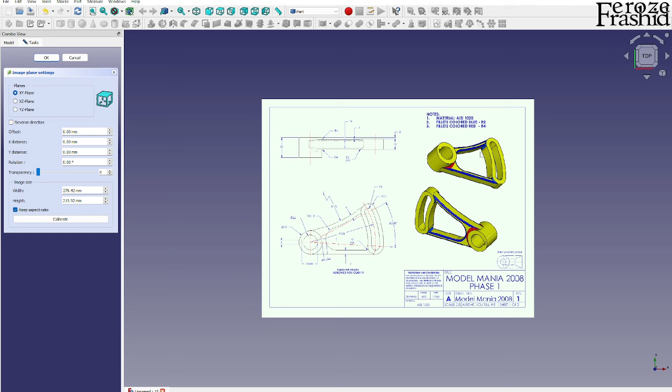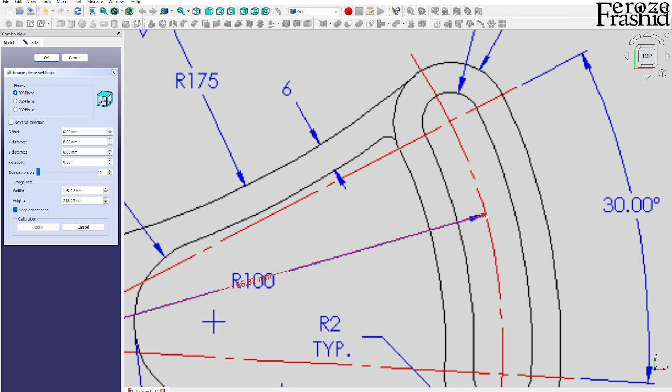On phase 1, I'll be starting with the whole sketch. I'll build this whole sketch first, which is a tricky one, as a master sketch, and use that to build this model in 3 separate parts. Although I'll build the whole sketch together, I won't extrude it at the same time - I'll separate that into 3 different parts.

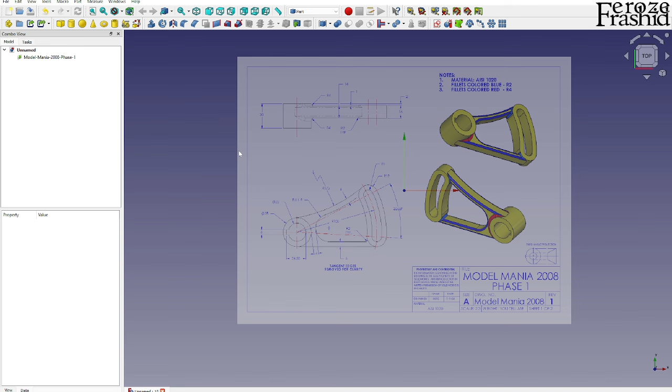I'm going to keep this plane on the XY plane and start sketching. Let's go ahead and relocate the image to the center.

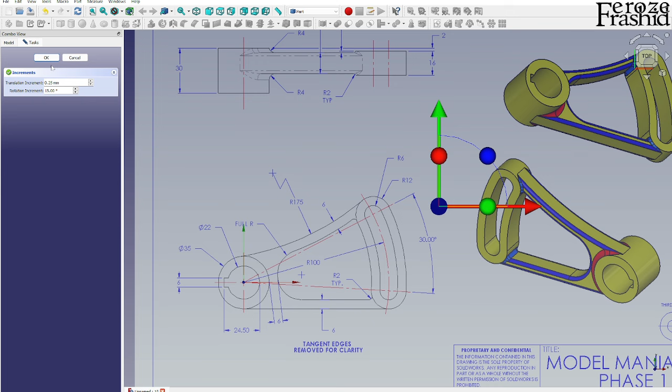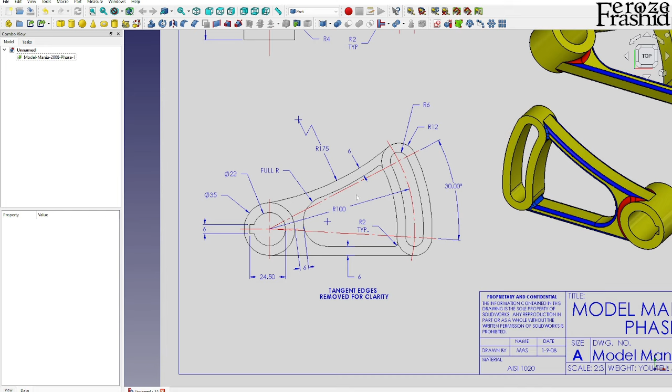All right, so what I did was image processing. I don't want to describe that right now because this image processing feature is going away in the next FreeCAD version 0.22, but there are multiple videos on my channel showing how I do that image processing.

So I want to start sketching on the XY plane. As I said, I'll be building the whole thing as a master sketch. Let's go ahead and start working on that.

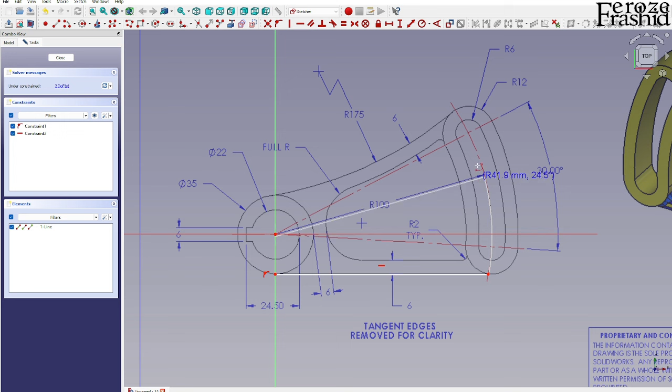I want to start with a straight line between this point and that point, and then draw this reference line. I think I misplaced this - so these two will be the same, and then these two will be the same. Obviously this will be construction geometry, just a reference line. I want to go ahead and apply those constraints.

I normally do the sketching first and then apply the constraints, but today, for this model, it's important that I apply these constraints as soon as possible because that will actually place things where they should be.

I also want to draw this construction geometry between this point and the center of this curved slot, so that I can apply this 30-degree angle right there.

I'm not worried about this moving thing right now - we'll address that in a moment, but let's get back to drawing different parts.

On this one, I could actually go ahead and draw the whole circle, but I won't, which I'll explain towards the middle of the video.

I want to take this point-on-line constraint away so this is free moving, and then apply a tangential constraint on this one, which is important - although it will end up on the same axis, it's important that I took it out.

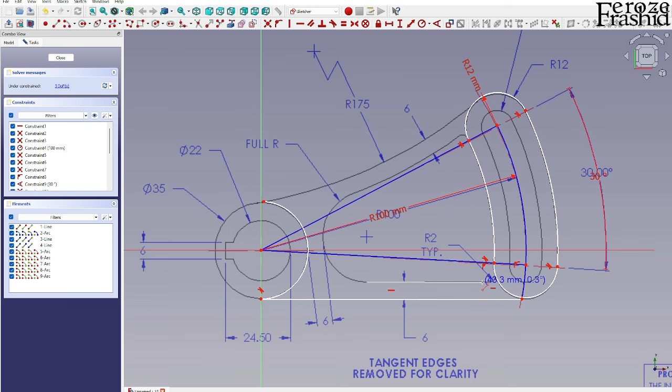Now I'll draw another straight line between this point and that point. Here, let me keep this line right there - there is this curve, which is essentially a fillet, and I want to avoid that right now because it creates a problem in FreeCAD later in the process. So let's forget about that curve, and bring this line all the way here, placing it on this curve as a point-on-line constraint.

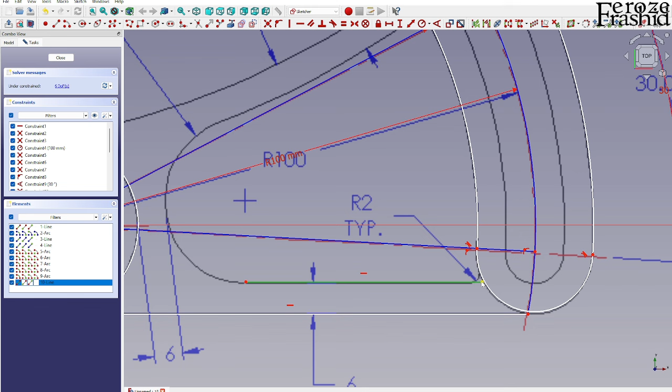And then I want to draw this endpoint and rim point curve and bring it up here, right there. So before I apply the radius, I'm going to go ahead and apply the tangency here at both ends, and then I say this radius is 175.

It is still switched a little bit. I guess we will have to fix a few more positions on this one. So let's go ahead and start working on the inner curved slot.

On this one, the constraint will be pretty simple. This is radius 6, and that's all we should have applied other than the tangency.

All right. One thing I can say, I can actually constrain this one 17.5, see if that actually helps us stabilize the model just a little bit.

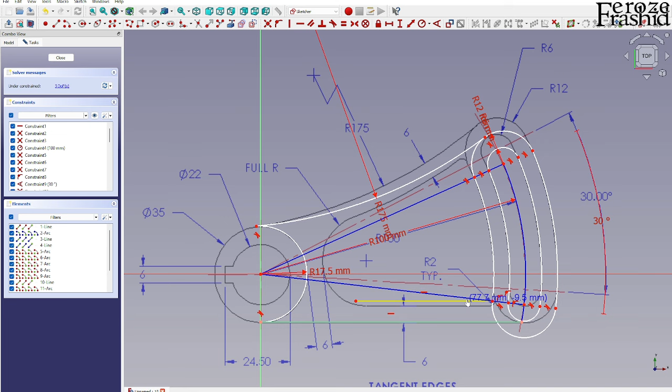Okay, there. So it's kind of like we are at the point where the model is a little stable, and we have 3 more lines to draw, one of them which is this inside half circle, and then we switch back to endpoint rim points and draw a line.

Again, this corner is supposed to be a fillet, and we are avoiding that one, right? And there, we don't want to make any tangency right there, so these 2 points are just point on line constraint.

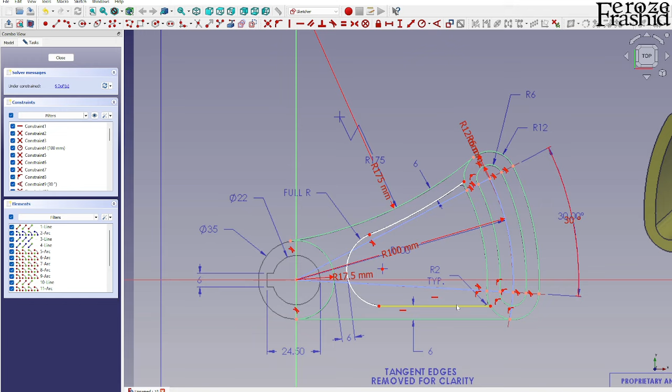I want to trace these 2 centers at the same point, and then see there is a 6 mm gap between these 2 points.

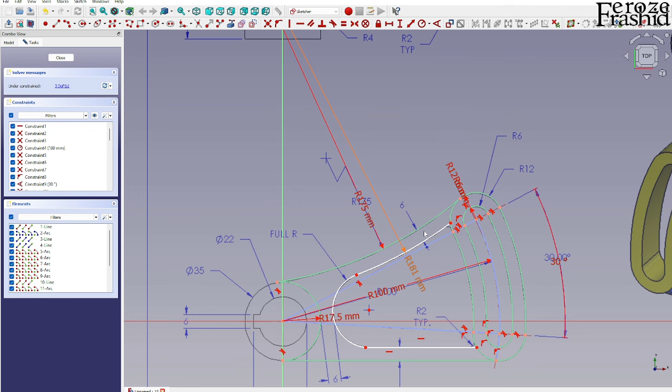So if it is 175, I take this radius as 175 plus 6, right? So that kind of makes it parallel because both of them are coming from the same center.

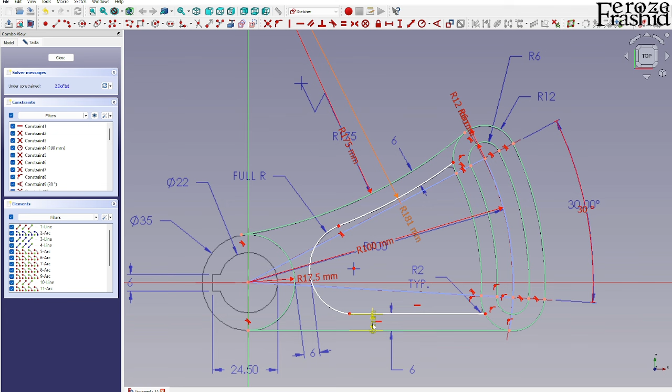On this one, the 6 is a different deal, and here we can make it easy. So between these 2 points, the distance is 6. That's easy to apply because both of these lines are horizontal, and it's easy to apply that. On this one though, it's not horizontal or vertical.

So what I want to do is take a construction geometry and draw a line between these 2 centers, both centers, for the respective arcs. Now we know that this line is perpendicular to both arcs.

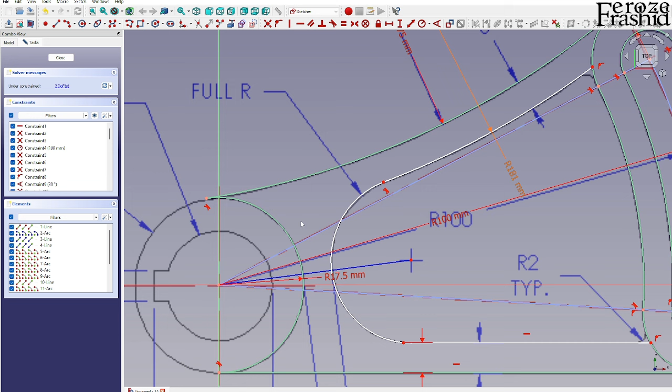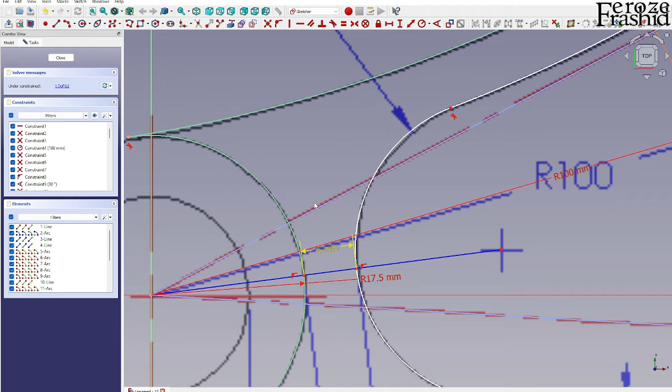Now I can go ahead and place 2 points on this line, and this point will be on this arc, this point will be on this arc, right? And the distance between these two would be 6. So that kind of solves that issue, this inclined length issue.

And we have 1 degree of freedom left, which is here, and I think I know where it is. There should be a tangency between this point, this line, and this line, and that kind of solves our issue. So on this part we did only half of it, so let's go ahead and complete the circle.

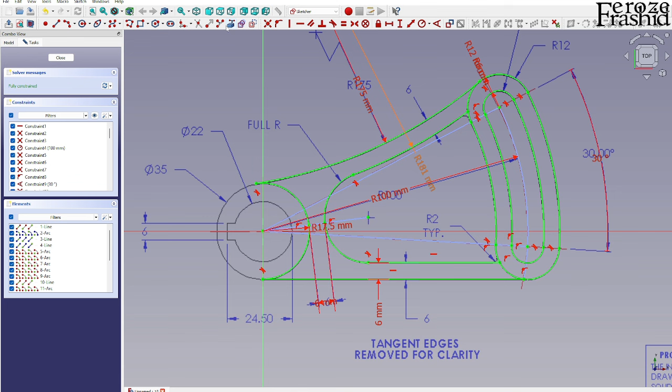Here I want to make note of this vertical line. So this is not like a full circle.

This will come all the way here, and then the joining will be a vertical line of 6 mm. So this length is 6 mm,

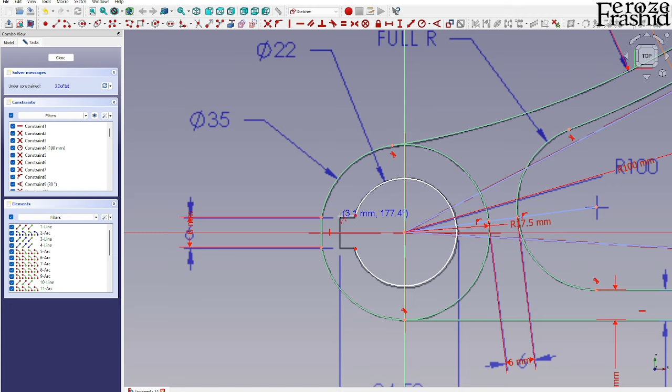and then the inner circle will follow the same trend. We come all the way up here, and then I divided this line into 2 to make it equal. That way, that's me saying these are symmetric, and then one of them is 3 mm.

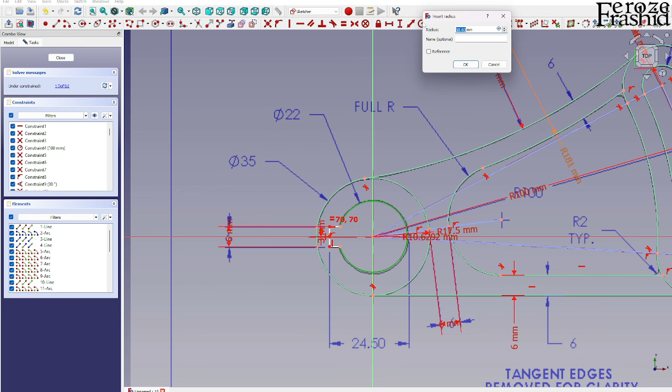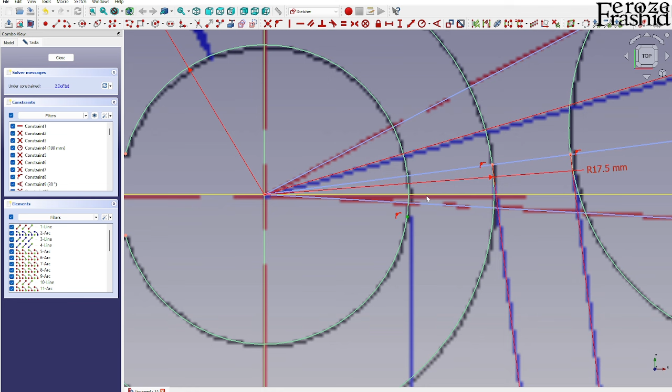And then we come back to this where it says diameter 22, so that's radius, diameter 22, radius 11. And then it says the distance between this line and this point, or like this farthest corner on the circle, is 24.50. So we go back to the point style and place this point on the axis. We know that that's the farthest point, and the distance between these two is 24.50.

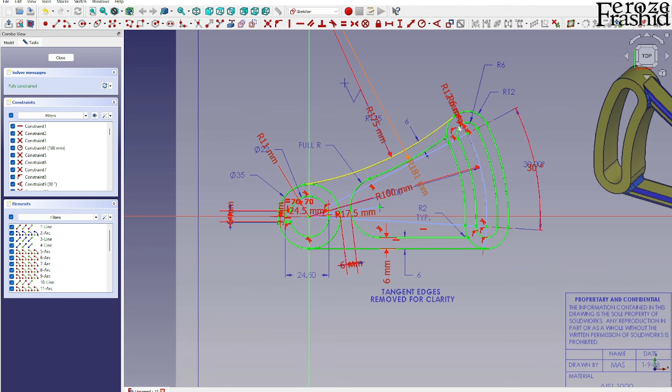So that's our master sketch. Everything's perfect except these corners. We'll try to build up those corners later on, but let's not worry about this right now.

And I'm going to go ahead and rename that as sketch master. I want to use this sketch to build this model in 3 parts: this is the left part, that's the right part, and there's the middle part. So I'm keeping this sketch there and then copying it, Control C on the keyboard, and then pasting it, Control V 3 times. Let's go ahead and say this is left, this is middle, and this is sketch right.

So we will work on them one by one. I'm going to hide this master sketch. Now these are copy paste, so we can change them independently. These are not clone.

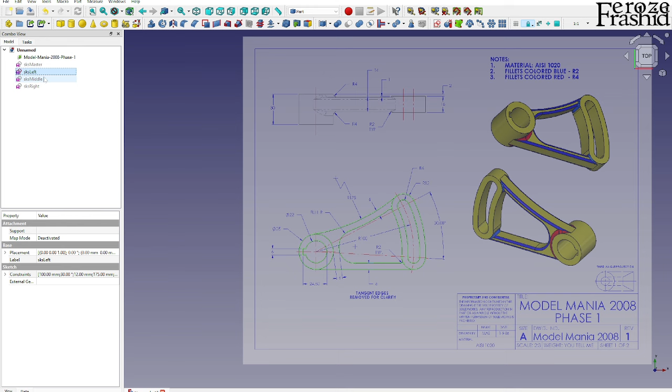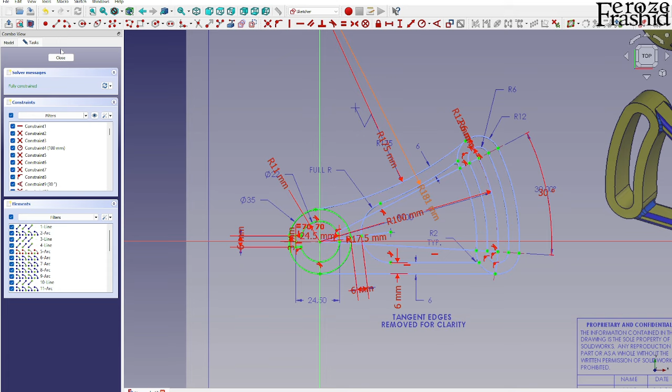I'm going to go ahead and hide these two and keep this one. So this one, I want to keep only this left part. I'm going to go ahead and select everything else and make those construction geometry. So this construction became solid there. So that's one way of saying this left of the right side is irrelevant for this sketch. They are there if I want to make them active, but now we only will get this left part.

So let's do that same thing for the middle one. When I was building this, I did not go the solid, so there are like two different parts. This is the reason that I did it. I'm going to take all of these and make them construction geometry, and leave this middle part, and then take all of these and make them construction geometry.

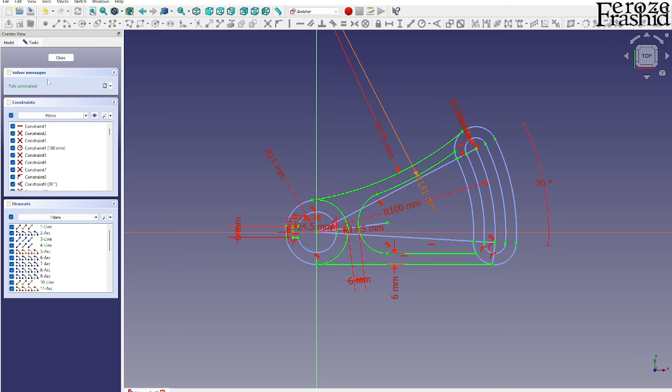So doing so, we have a not closed sketch which won't work, so we'll have to do a little bit of work on this one. So we want to close these two lines here.

So I am going to take another arc between this point and that point, and I'm going to say these 2 points are coincident, and I can make these two coincident. Theoretically that should work, but it creates some problems. So that's kind of like over constraint, and that's like too many complications.

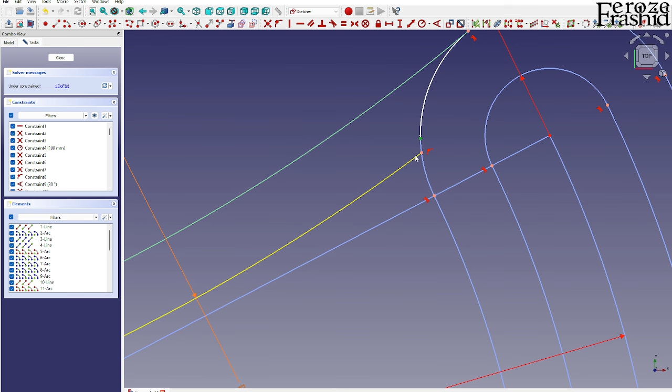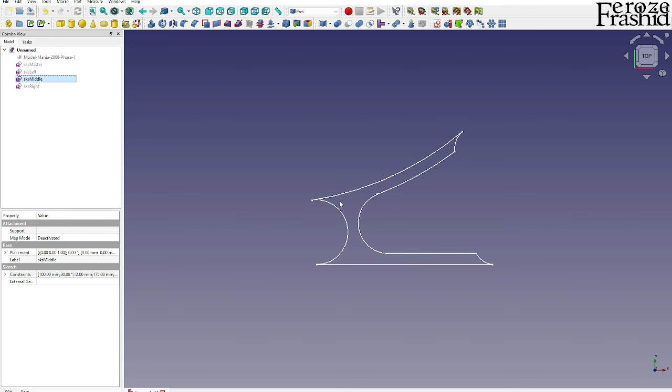So let's go back. What I want to do is I want to take this point and place it on this line, and that just does the trick. As long as it's constrained, I'm okay with that. So let's do the same thing on this side. I want to make these 2 points coincident, and then take this point and make it on this line, and there we have a closed sketch, which is important.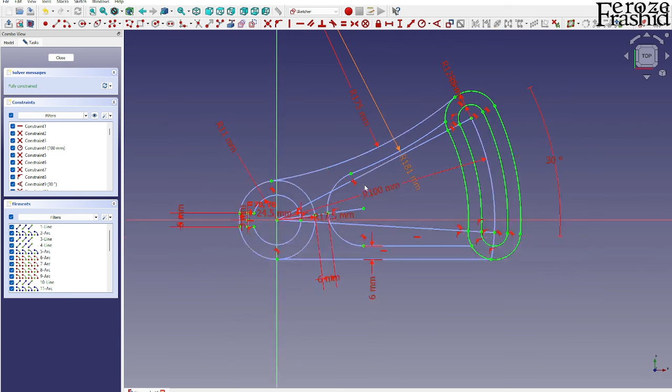And then right side should be easy. Take everything on the left and make it construction geometry. Well, this one will have to bring it back as construction geometry, and that's it. That's the right side.

Okay, so we have the master sketch. We don't need that anymore. We will use that to duplicate this 3, and now we will extrude that one by one.

So let's take a look at this figure. So the left side, it will be 30 millimeter. Right side will be 16 millimeter. The middle one will be 14 millimeter, but they are not lying at the same length. So we'll have to find a common ground and then make it work.

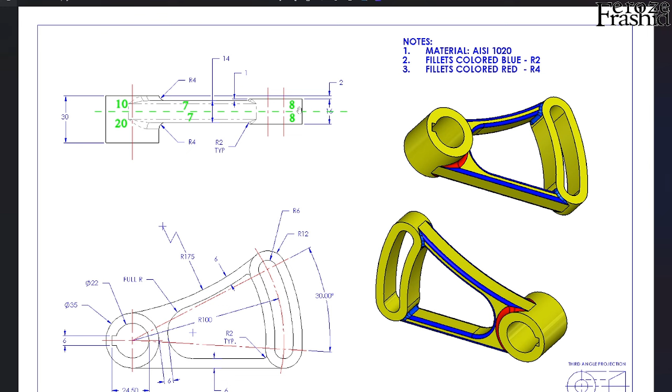So what I did, I found a common line and then divided all 3 parts on top and bottom of that common line. So let's go ahead and work on that.

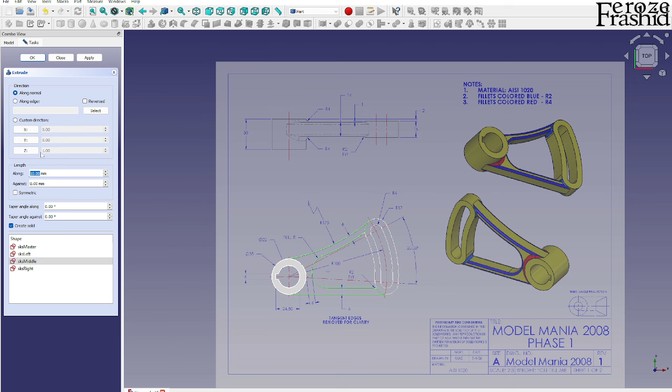So on the left side, if we imagine a center line here, the lower part is 20, upper part is 10. I want to take the left one and extrude that for 10 upward and 20 downward. And the middle one, we want to do the same thing, but from the center line it will go up 7 and come down 7. On the right side, it will be 8 and 8.

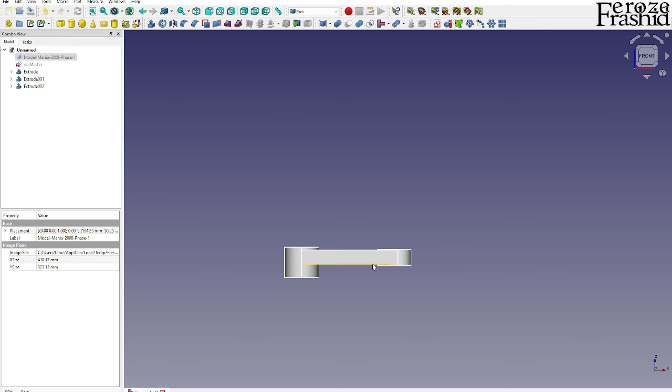Okay, let's take a look at what we did. What we did is we build this object based on how they're laid. So the distance between this line and this line is 1. Let's take a measuring. So the distance between these two is 1 and these two is 1, which satisfies our requirement. Let's see how it looks.

So the distance is 3 here, and this is 13 here, and this whole thing is 14. So that is 30 millimeter in total.

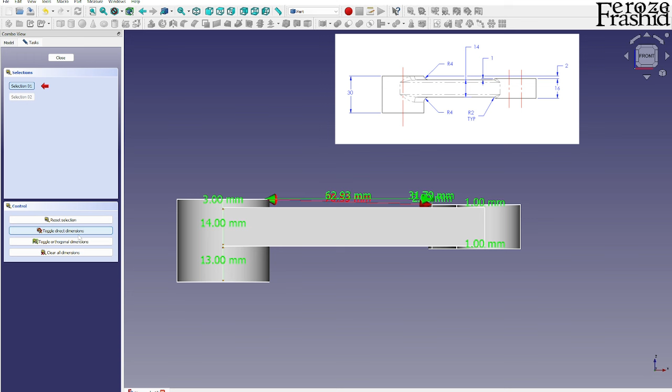And we have another thing. So the distance between these two should be 2 millimeter. So there, the distance is 2 millimeter top and bottom. I think that satisfies our need, and that is our phase 1.

So this is our phase 1 completed. Phase 1 says we'll have to build this model, and we did it without the fillets.

As I mentioned, let's make these. So I'm going to rename that way I can come back to the model when I work on the phase 2.

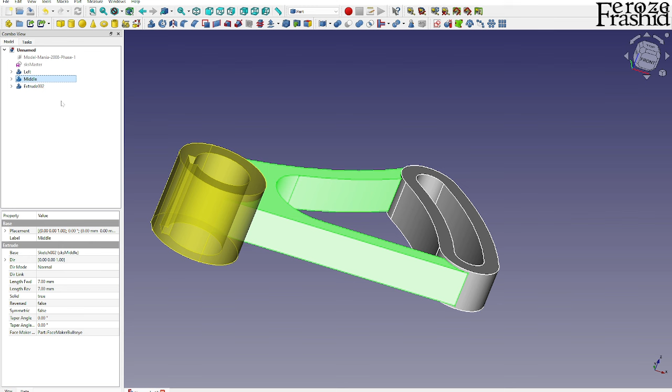And I want to make them fusion. So this is, I'm going to say phase 1.

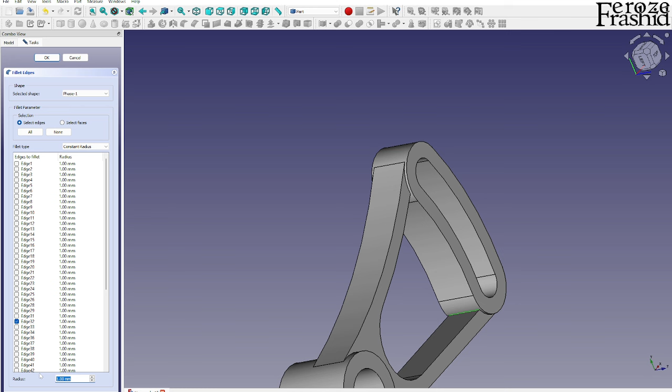All right. Now I can try to make that fillet here. I'm sure it will work because it's only 2 of these, but I cannot make all of them. So there. So we built it as specified in the technical drawing.

There is a corner fillet. The blue are R2. We did it. The rest of them, I don't think it will do it. So this is only 3.

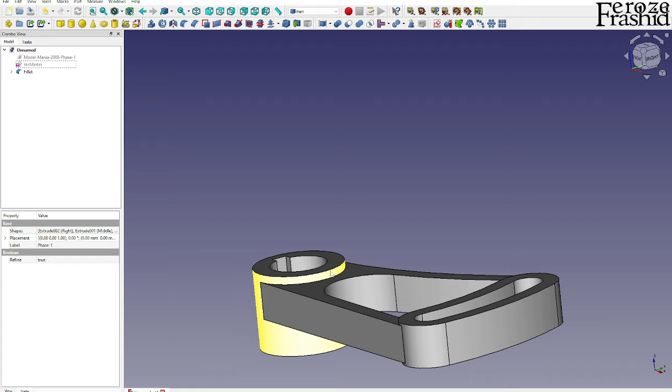This technical drawing asks for 4 millimeter fillet, which I'm sure it won't work. It probably will take 1 millimeter. Nope, it won't even take 1 millimeter.

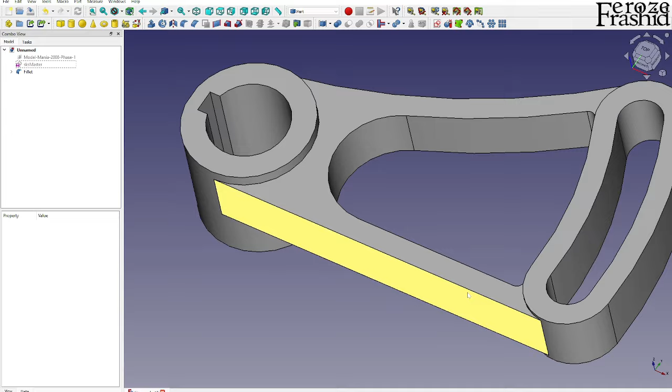So we know that FreeCAD has this issue. Hopefully it will be solved soon. So until then, let's not worry about the fillet. We know that they are there, just not worry about it right now.

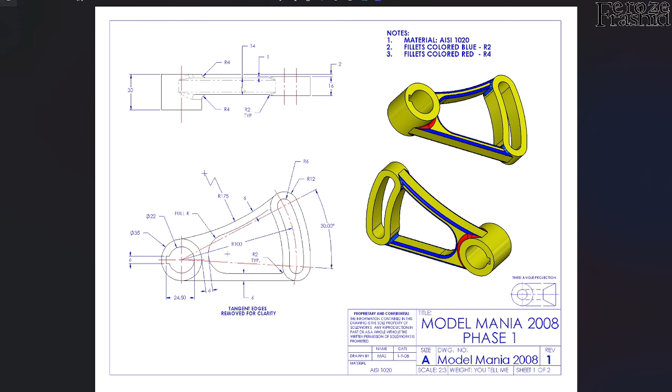So that's the end of phase 1. I want to go start work on phase 2. The distance between phase 1 and phase 2, the difference is this thickness. It used to be in phase 1, this thickness is 6 on the middle part, on both arms. On phase 2, it is 14. So that's one change. And then this thickness is 8 on the mid part, which is 14 on phase 1. So the thicker part becomes thinner, the slim part becomes wider. That's phase 2.

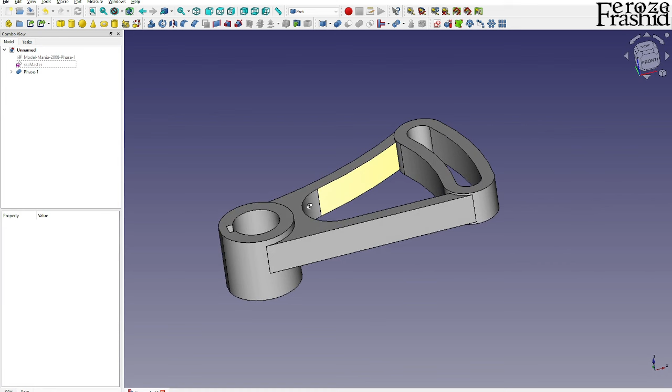And then it will call for FEM analysis. We will try to do that, but let's work on phase 2 first. I'm going to delete this fillet. I know that it will create an issue, but we deleted that fillet and start working on phase 2. All right, so we saved it. Now this phase 1 will actually be phase 2.

In phase 2, first thing first, we will have to go to the middle part and update this sketch. So this 6 millimeter will be 14. Watch what it does when I say this is 14. It thickens the part, but look at what happens here. This slot comes over and kind of gets into the bar, which should not happen like that.

So we'll have to fix that, and that's why this fillet here would always create an issue in FreeCAD. I'm sure it will be solved in like 2 years or so. Until then, I want to bring this point

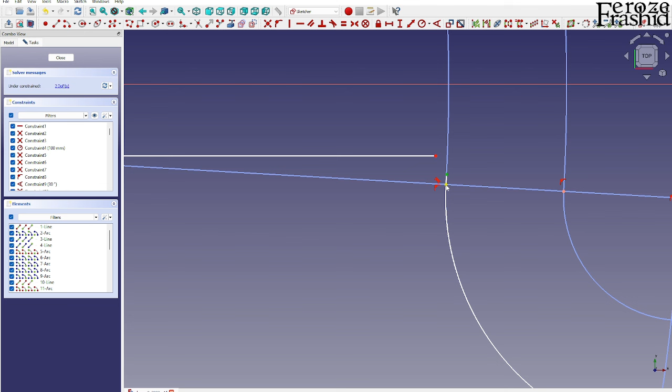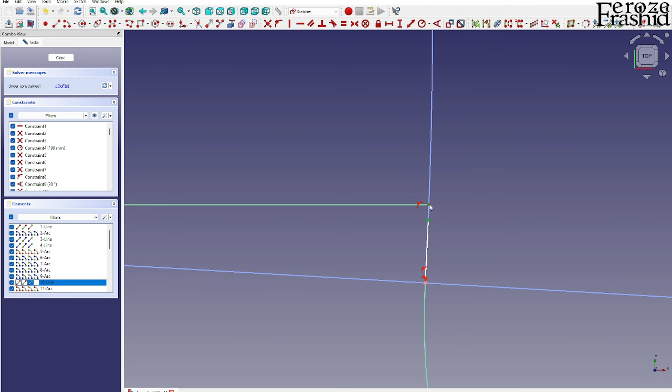on this line. So bring this point on this line, right? And take this point on this line, on this curve. And the gap is actually a curve with center from the left side. So we want to take it from here to there and try to make these two coincident. It worked. And we'll have to do the same thing here.

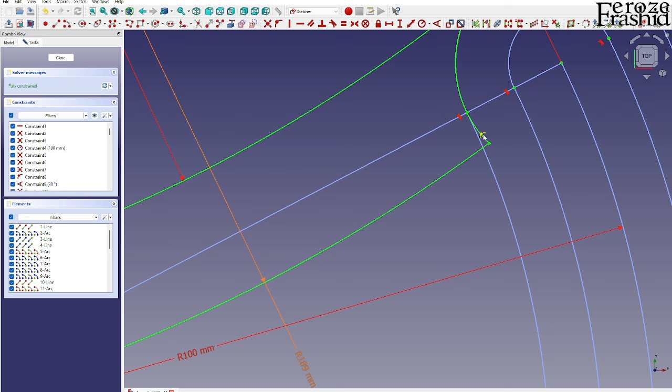So this is 106, which is like 6 thickness. Now it will be 14. And that does the same thing. It is more visible on this side. So let's do the same thing. Delete this constraint. Take this point back. Take this point on this line, right? And then fix this part.

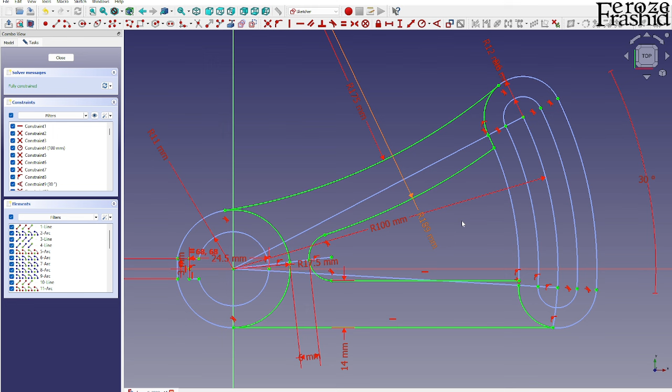So if this was not an issue, we would be able to do this in the configuration table. Because this part is not working fine, I'm sure there is some way that I probably don't know, some advanced way in FreeCAD, but until now that's the limit of my knowledge, and it's working fine with me to do this manual thing, and that's one reason why I'm not doing this in a configuration table.

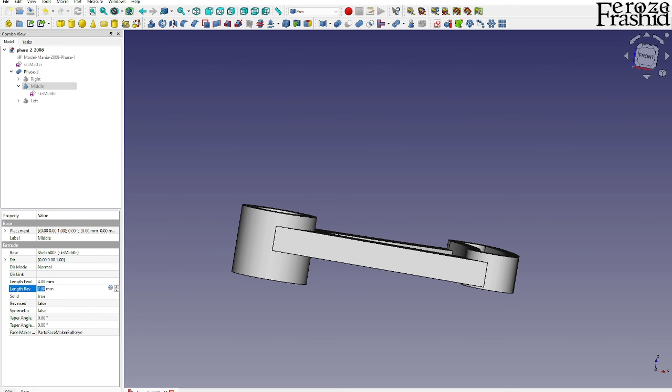All right, so we have that second part worked out. So this is now thicker. Now we'll have to make it thinner on the Z direction wise. So this middle part we have 7 and 7. Now it will be 4 and 4. Let's see, 4 and 4. So everything else at the same location. The only thing is this middle part became thin on the Z direction and thicker on the Y direction.

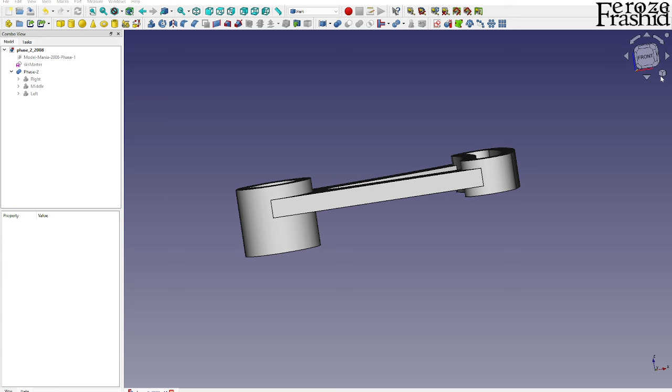So that is our phase 2 solved. That's what phase 2 calls for: 14 and 8, we got that. Pretty simple. Now, just to make this simple, we had to make these 3 parts independent, so I could come and change this sketch without much referencing between all of these. Hope that explains. All right, I think that's half of phase 2 completed.

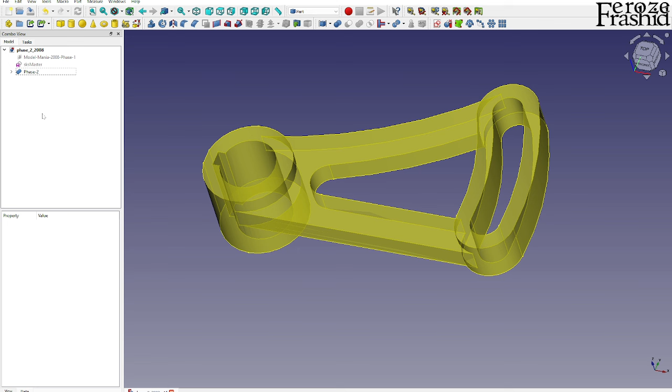Now we go to FEM. It says on this face apply total 400 newtons and then fix this face. So let's see if we can do that. Let's go to FEM. FEM comes with FreeCAD, so if you don't have it, it's there, you don't have to install it. And on FEM, we'll just go step by step, like that's how the standard procedure is. We'll go with analysis container and then add a solver, add a material.

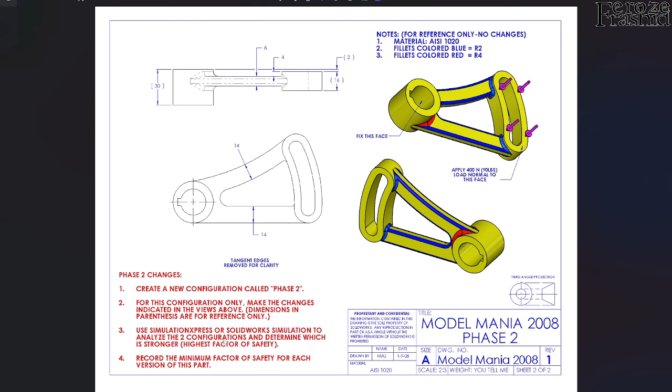What it does is it says use FEM to analyze the 2 configurations and determine which is stronger. So we'll have to do FEM analysis on both parts, and we will try to get the result out of it as much as I can from FreeCAD. I know that it won't give us any factor of safety, not readily. We'll have to calculate it. But we can find this end goal, like determine which is stronger. We definitely can do that based on stress and displacement analysis.

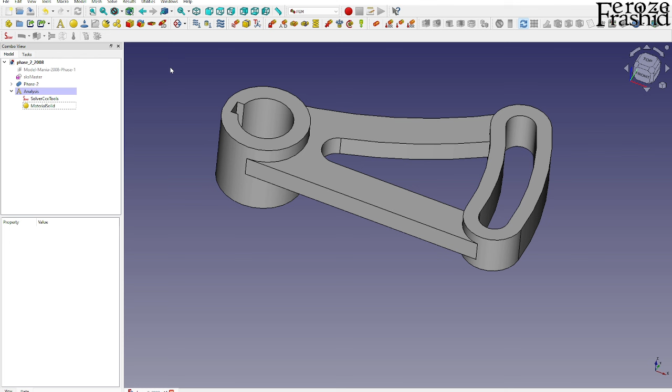All right, so for this one, we applied aluminum generic. As long as we apply the same material for phase 1, we should be fine. Now come to the fixed part. We add this point and hit OK. So that's our fixed support. And then we add load on this face. This is the load button, constraint force, and then we add on this one. It says upward, but actually our direction says downwards, so say reverse direction. That brings this downward. And it says 400 Newton. So 400 Newton.

The last thing on this phase of the analysis is to take this object and create a mesh. Without going into much detail, the finer the mesh, the more computing power it takes, but there's a good chance this will work out. So I'm going with a 10 millimeter mesh to see if it works.

Now in the analysis container we have solver, material, the support system, the load system, and the mesh. At this point we double click on the solver, write the INP file, and run Calculix. We're looking for nothing red here. As long as there's nothing red, it worked. All right, it worked pretty good.

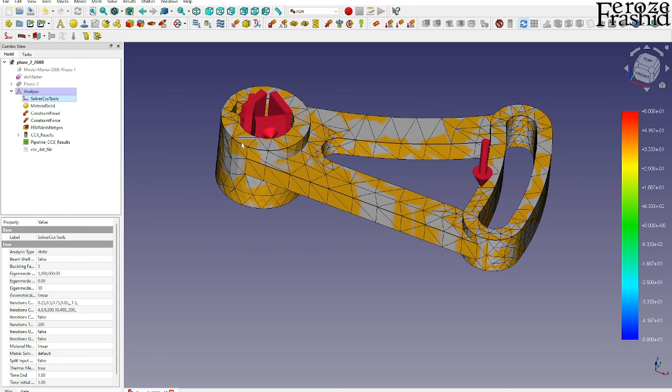Now I want to hide this mesh and go to CCX results and double click on it to look at displacement and stress. On the displacement, we see the maximum displacement is 1.16, and that's the value we want to note. I also want to note the stress, where the maximum stress is 133 MPa. So those are the values we need.

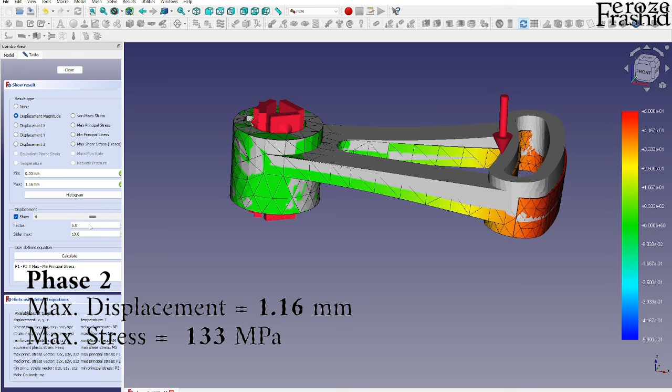Before getting out, I can see how this model will act under load. So I check this box and then see. That's almost 100 times exaggerated, so let's take it down to 10. That shows 10 times what will happen. It will have 1.16 millimeter displacement at the furthest corner because it's a cantilever system, and that's how it will bend.

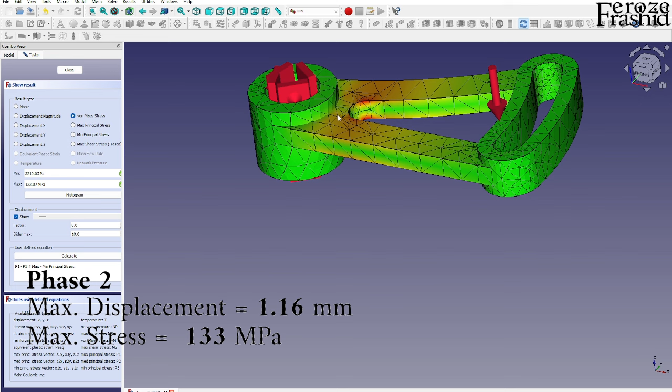The red part means that's the maximum deflection. On the stress side, the maximum deflection point has the minimum stress, and that's like a rule of thumb. Let me hide this so we can take a clear look at the stress part. It explains that near the support it will have the maximum stress, so the red part is right here. It's stressing - the tension is right there, and the compression is underneath. That's how it's stressing.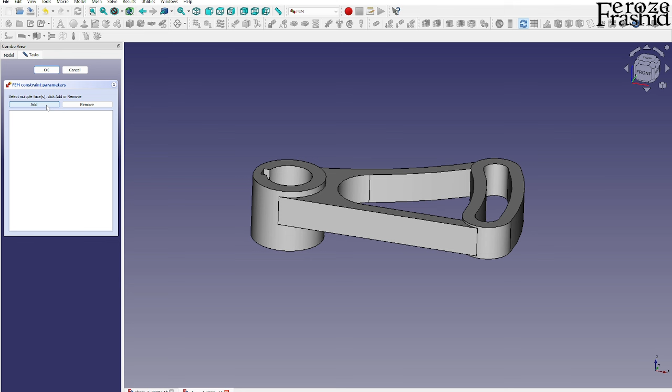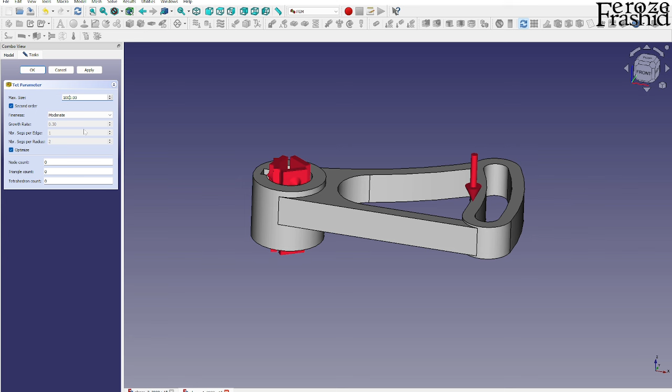All right, enough fun about phase 2, let's go open up phase 1. So we have phase 1 opened up, and we want to do the same thing: analysis, solver, material, aluminum generic. The fixed part would be this face, and the load part would be this face, but in the reverse direction. Then we do the mesh, a Netgen mesh with maximum size 10, apply and OK. Now we write the INP file and run Calculix.

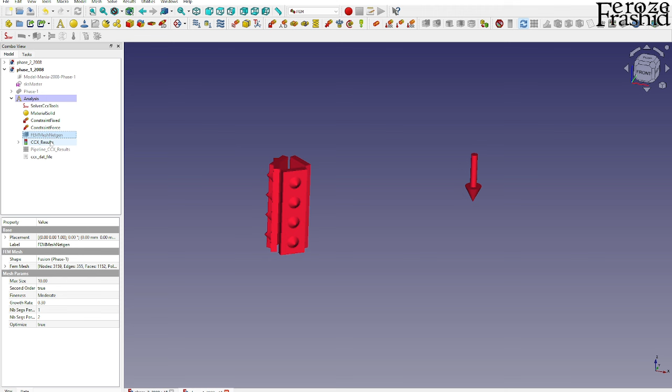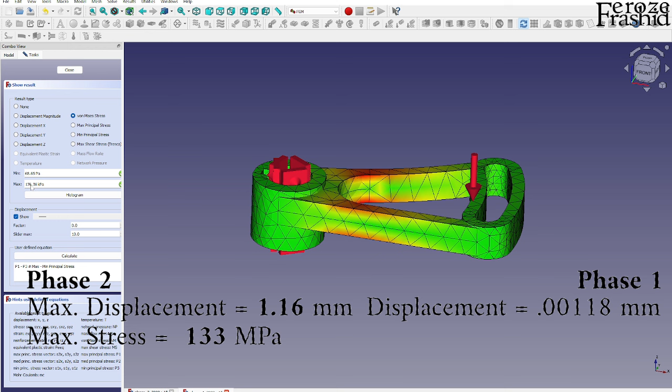Pretty quick - simple object takes less time. I'm going to hide these two and go to the CCX results. First we want to look at the displacement, and we see the maximum displacement is 1.18 micrometer. We want to look at the stress - the maximum stress is 176 kPa.

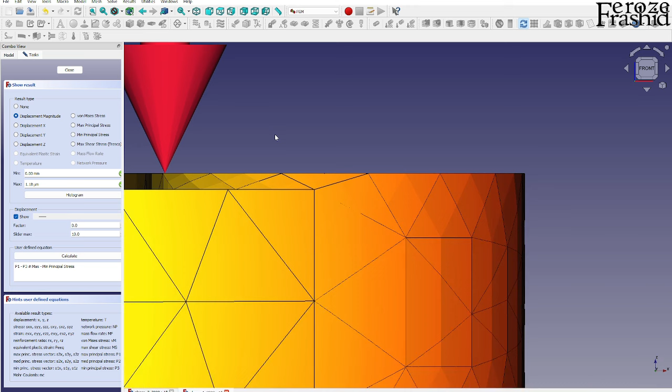The pattern is the same. On this one, because the displacement is so small, even this 10 times exaggerated displacement is still small, but we can see the very little displacement at the end right here. The pattern is the important thing, and it shows up the same.

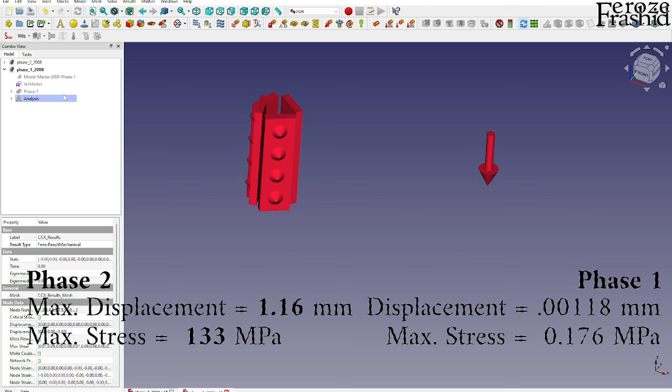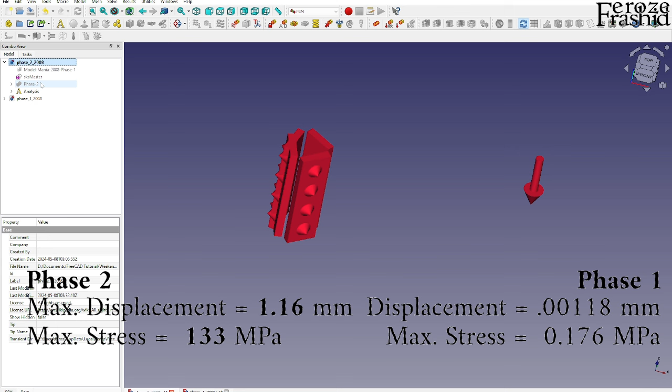So now we have two values, and we could go ahead and calculate the factor of safety. These values tell me that phase 1 is definitely a better design than phase 2. Actually, we don't even need to look at the FEM analysis - we could tell by looking at the model, because this is the bending profile, and the thicker the beam is depth-wise in the direction of the load, the better the design. In phase 1, the thickness of the beam in the direction of load is thicker compared to phase 2, so obviously phase 1 is a better design.

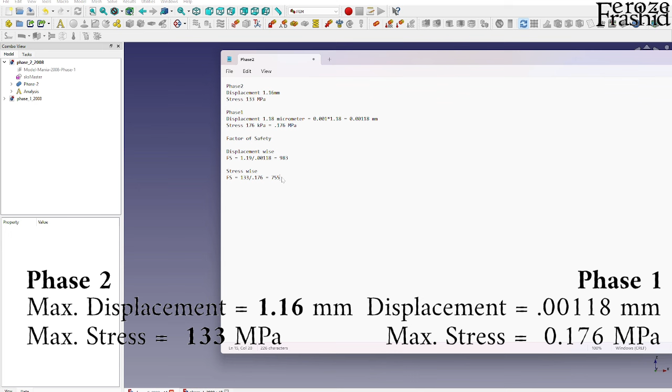So we can say our mathematics kind of verifies our basic beam design. In this case, like strength of materials, in the direction of the load, the thickness of the beam should be higher for a better design.